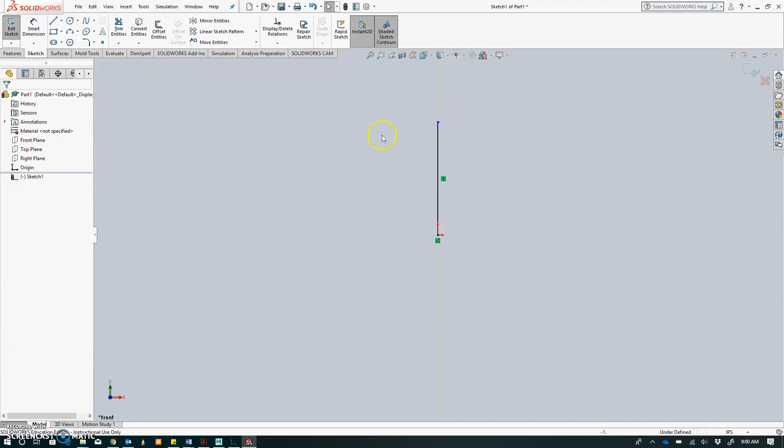To change the unit measure to millimeters instead of inches, so I'm just going to cancel that, and go down here to change to millimeters, grams and seconds instead of inch, pounds and seconds.

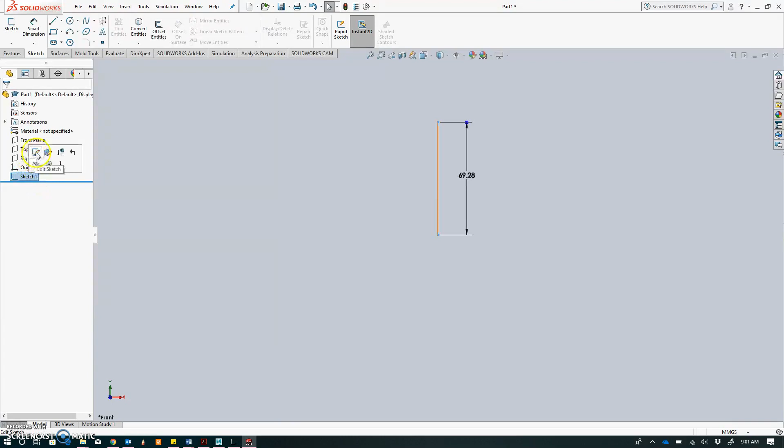I'm going to go back into the sketch by clicking sketch, edit sketch, and go back to my smart dimension here. You can see that the unit measure has changed to millimeters.

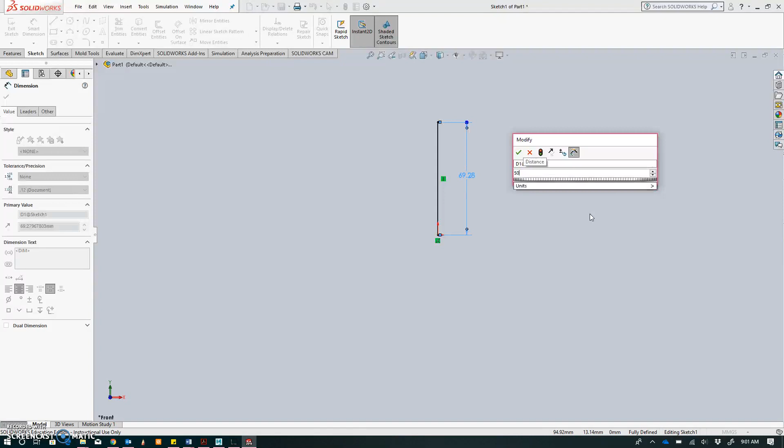I'm designing a chess piece in this instance, just to show a simple revolve. So let's do a chess piece that is about 5 centimeters, so 50 millimeters. I'm going to use the spline tool here, but before I do, I'm just going to square off the base before I revolve, so this will give me a nice square base at the bottom.

I'm going to press escape to end that chain, and I'm going to use the spline tool.

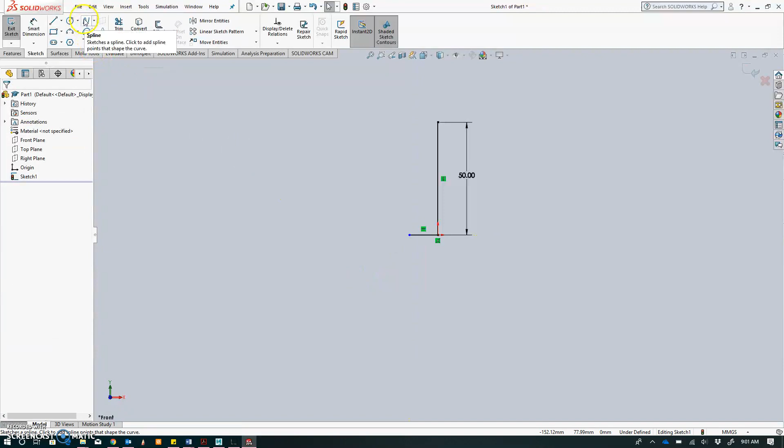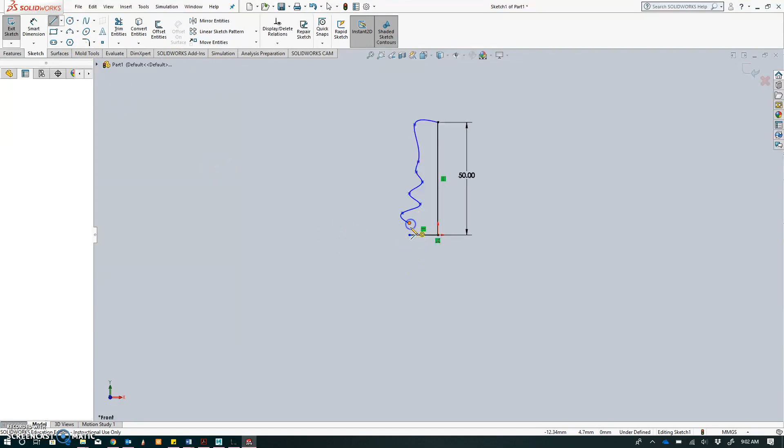Then I'm just going to press escape again to end that chain and use the line tool again and just connect these two points. I'm going to zoom in using the wheel on my mouse here in SolidWorks.

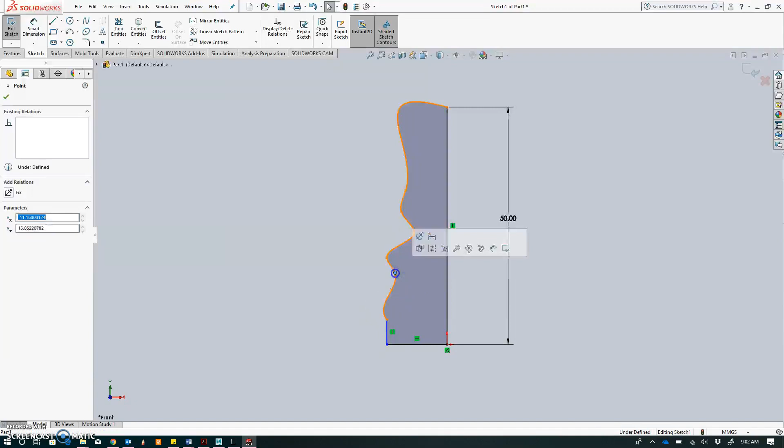I'm going to press escape so the selection tool comes up, and now I can click and drag these nodes on this spline tool, and that'll give me some control as to how the shape actually looks.

Before I revolve it, I can always go back into this sketch even after I've revolved it. That's the wonderful thing about SolidWorks - you can continually edit your sketches even after performing a feature in the Features tab.

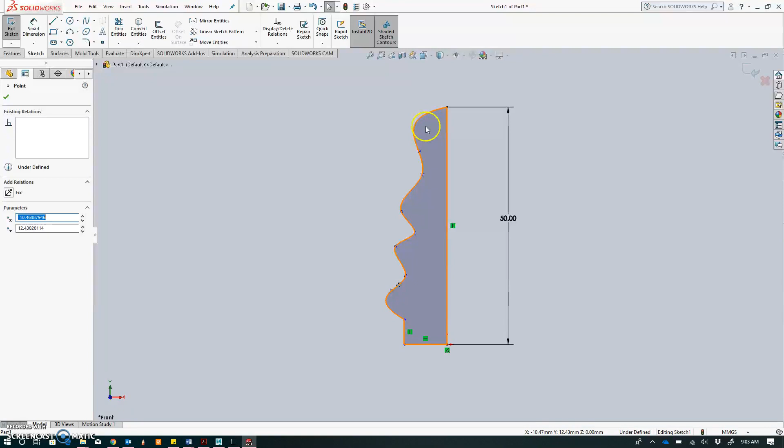So let's say I'm happy with that. You'll notice that this shape is all shaded - that tells me that this is a valid profile. If you don't have a shaded shape like that, chances are that maybe one of your points isn't connecting.

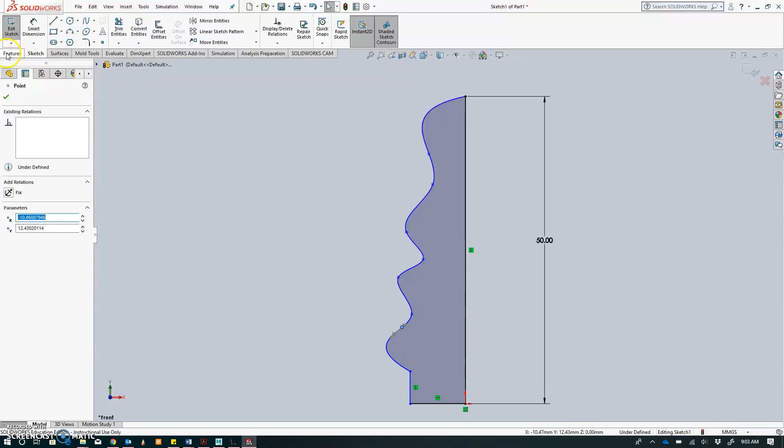So you might need to zoom in and have a look to see whether any of those points are not actually joining up. So what I'm going to do now, before I close the sketch, I'm going to click on the Features tab and click Revolved Boss/Base.

If you've already closed your sketch, then you would need to go into your design tree here, and you will need to click on Sketch and Edit Sketch. Left click Sketch, and then you'll get a little box where you can click Edit Sketch and it'll take you into the sketch. Or you can just click Revolve, and it will ask you which sketch or plane you want to revolve on.

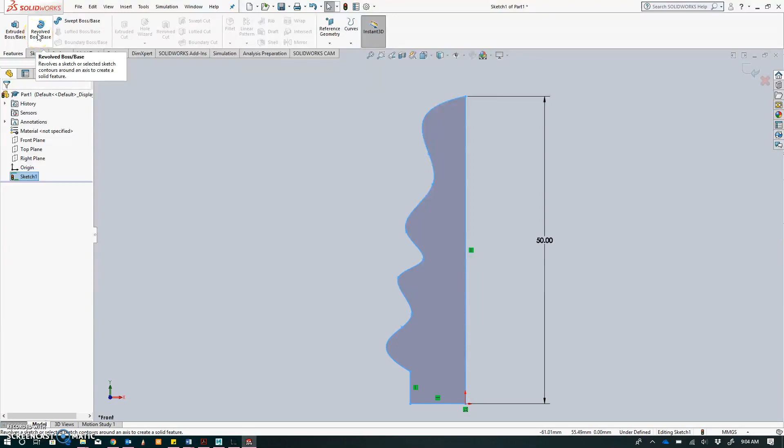So I'm just going to click on that Revolved Boss/Base. It's asking me for an axis of revolution, so that is the straight line that I want to revolve around. And I'm going to revolve 360 degrees because I want it to go all the way around.

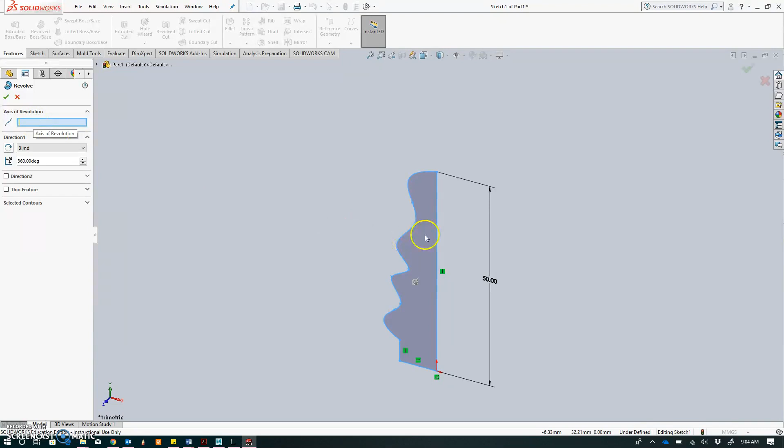So I'm just going to click here just to make sure that this is selected. It's already highlighted here, which tells me that it's asking for my axis of revolution now. So I'm just going to click on this straight line, left click here, and you'll notice that it's done its job - it's gone all the way around.

Still not happy with how it looks, so what I'll do from here is edit that sketch. I'll click on this little arrow here, which opens up that revolve feature, and then I'll click on that sketch, and then click edit sketch like I was saying before.

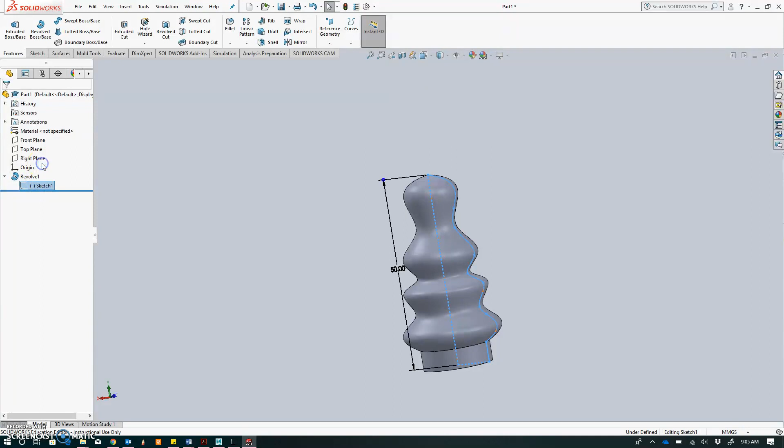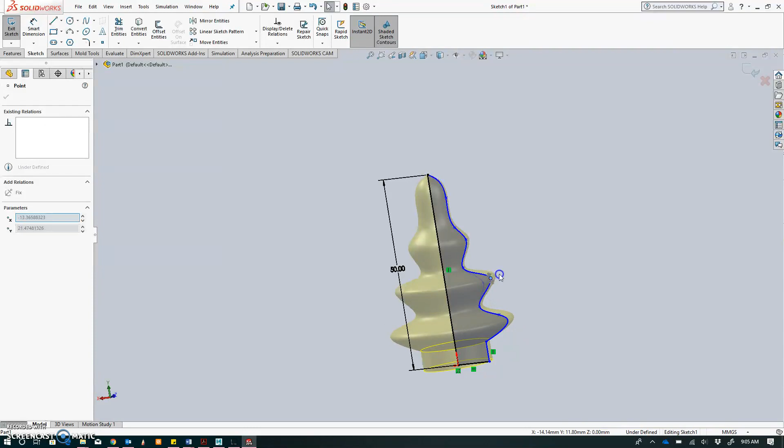And here I can have a look at what I want to do, and I can have a bit of a play in real time, and I can see the preview straight away as to what it is that I want to create here. So I don't know what kind of chess piece I want to make, whether it's a pawn or whatnot, but I can do some crazy things here like that and just create maybe a queen - it's entirely up to you what you want to do here.

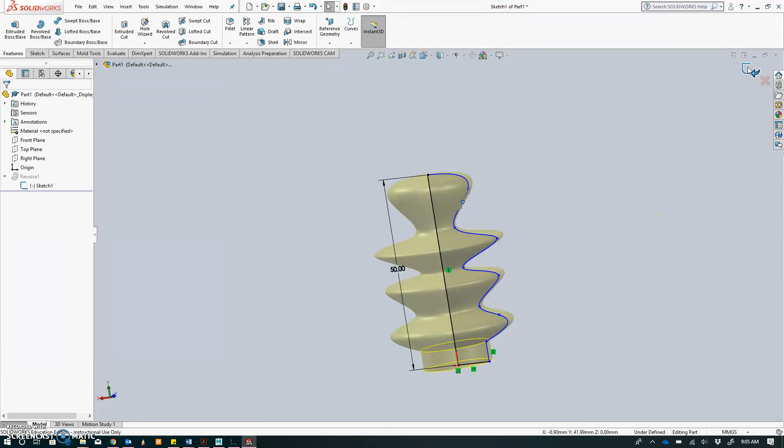And to update, you just click OK. To rotate in SolidWorks is the middle mouse button, and you just click and drag. As I mentioned before, zooming in is the middle mouse button, zooming in and out, just like that.